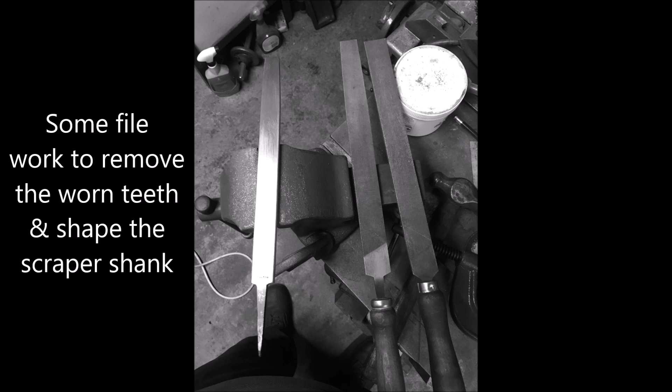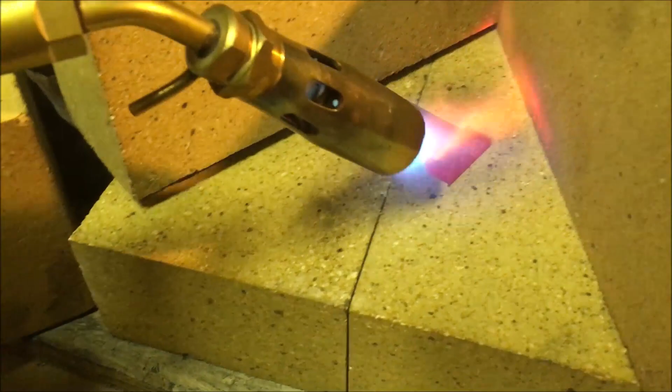Got Junior on the silver soldering, making another carbide scraper. Done that, plenty of solder in there. Just wetted out the joint, and I can feel the heat from here. Keep it flat.

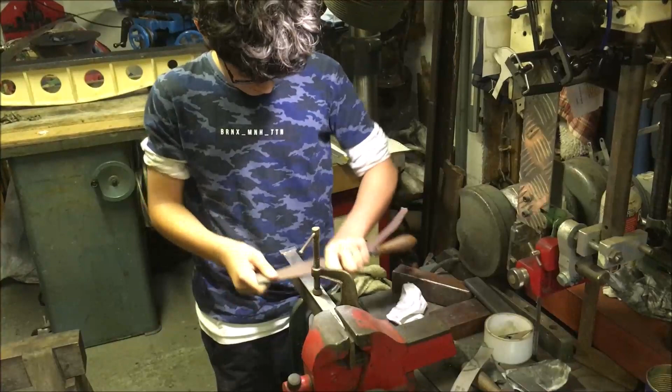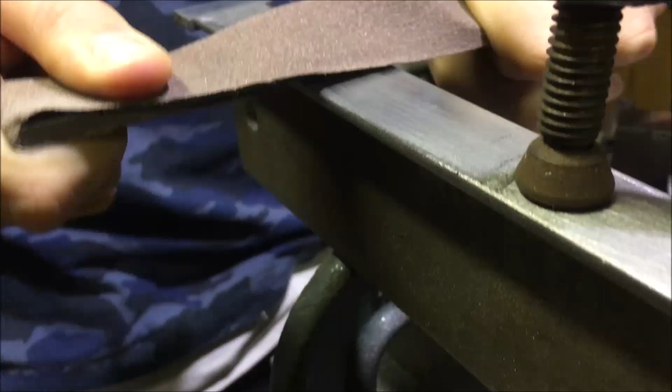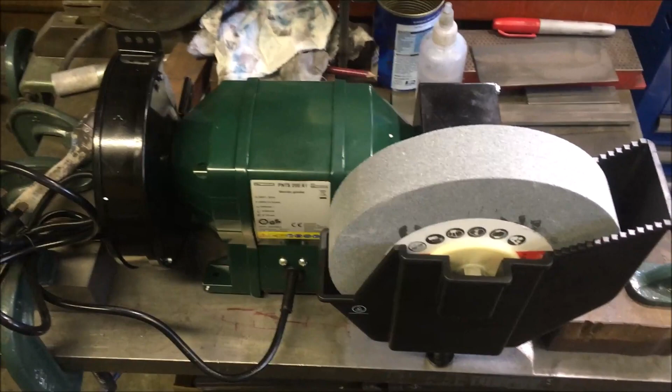So this is what we're going to make our carbide grinding jig out of, and this is a direct crib from Robin Renzetti, who showed it on his Moore style scraping video. I bought it new. Ironically, I had a slightly, well, a much better version of this when I used to do wood turning, and it was quite a handy piece of kit. I sold that for about 160 quid and bought this one 8 years later for under 40 quid delivered.

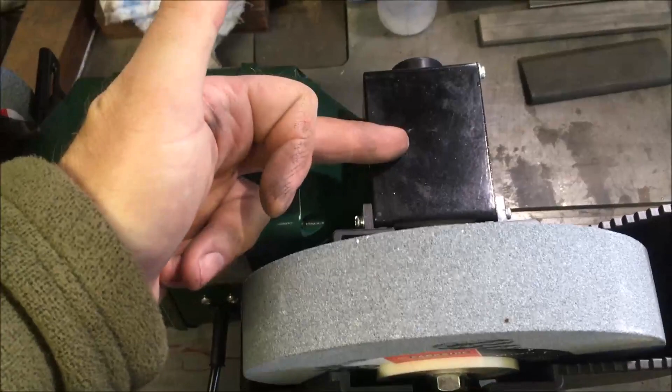So you've got a standard grey wheel there whizzing round, output shaft on this end of the grinder, then it goes through a worm gear on here, and it gives you something in the region of about 85 RPM this end.

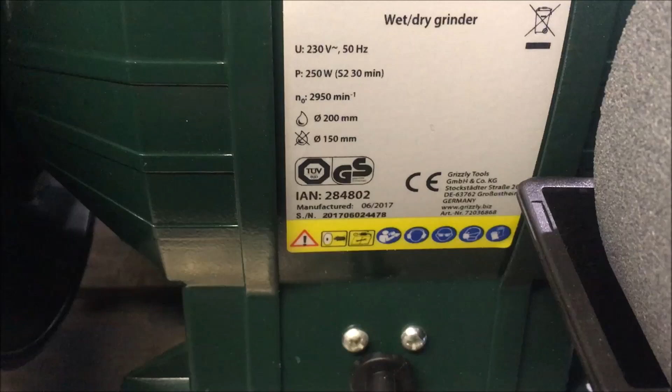So I'm going to take off this paraphernalia, take the large stone off which I'm not using, probably take the small stone off, have a look in the gearbox and see what's there, and then I need to come up with some kind of mandrel setup that enables me to put one of these 6-inch discs on. That's the plan for the day.

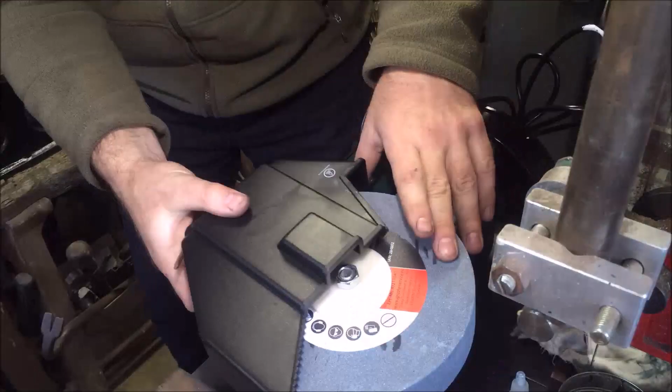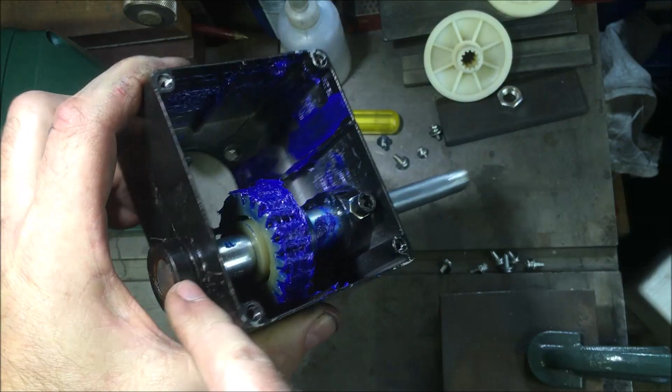Right, so that's the worm wheel. It's sat in two very thin bearings, if they're in there. I'm not bothered taking the shaft out. Basically, it's a 12mm diameter shaft, which is handy because that's the diameter of the discs. Then it steps up, then the worm wheel, and then it's through to there. What I can't see is where the end play is taken.

I assume it's got a groove in that larger diameter, and then that's in there, and then everything's held in place with roll pins. That's like a phenolic or resin, and the worm looks like steel, and it does actually look machined, it's not cast. So I'm not going to do anything with it at the moment.

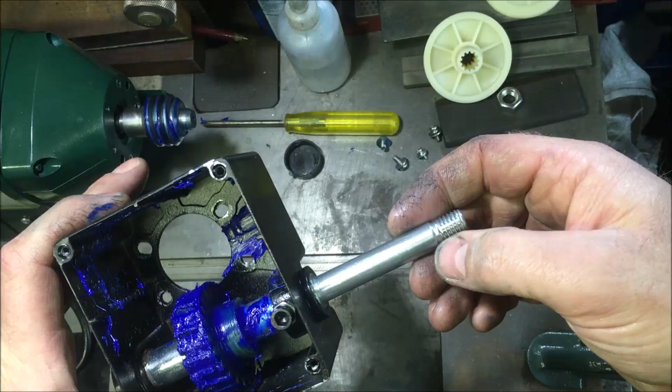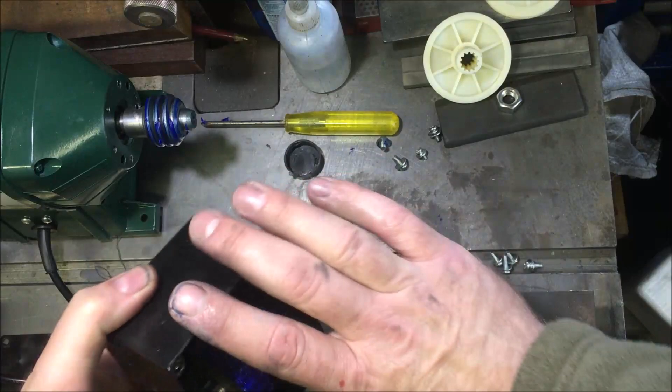I'm going to put it back together and basically cobble up the drive. I'm wondering whether to mount it that way round, which will put the wheel underneath the worm rather than over the head. But I just need to check my heights. It just means the thing's not sitting up here kind of thing. So I'll bring you back when I've done that.

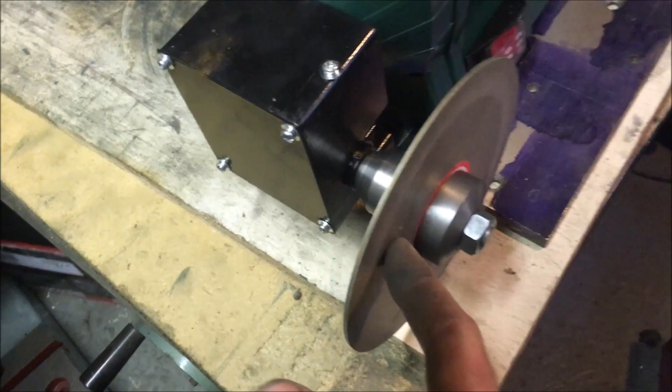Alright, so a bit of an update. I've got the discs mounted now. I've made up a locking washer spacer and a spacer at the back there. It took quite a bit of pissing about trying to get that as a nice tight fit on the shaft, because the shaft was varying in dimension - there was 5 thou variation in it. So I've ended up making the holes undersized, and then I've hand finished the shaft with some abrasive paper.

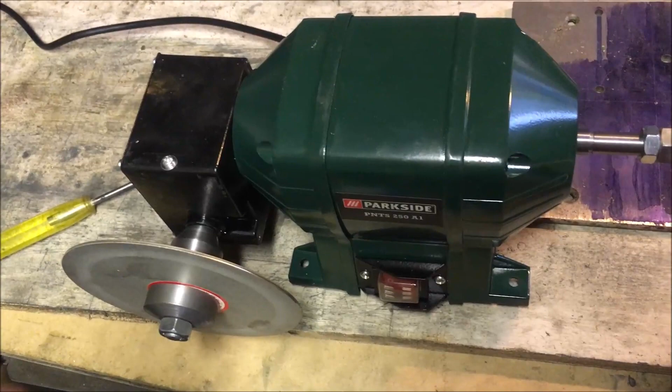So that's on now. I've also swapped the gearbox around. I've decided that I wanted a more compact setup, so I've switched it over. Not least because what I found was I just fired it up and ran it, and there's a tight spot on the worm. So it's free now.

It's not on the worm, it's on the worm wheel. There, it's just coming in now. There. And then it's free again. I'm figuring it's something to do with it being a plastic gear - it's perhaps got a bit of swelling on it, something. Anyway, it'll bed in, no doubt.

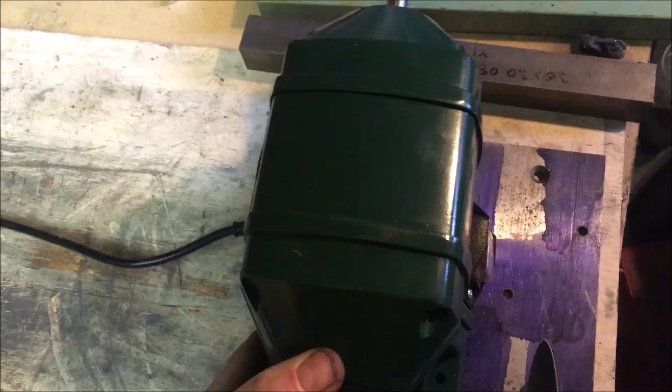So the next problem is to suss out some kind of mounting mechanism without the wheel on the end of it. This thing's a little bit heavy at this end, so I'm going to mount it on a steel plate, and then I want some means of setting up a guide jig here to give me my inclined angle. So as the disc's running around this way, it grinds inwards.

Stefan had used these discs on the high speed end of the grinder and done a sort of temporary setup - I think he's got a piece of wood mounted at the angle. So it's not got to really be anything fancy. What I do want is to be able to set it and not piss about. I want the angle to stay the same once it's set, through whatever it is I'm scraping.

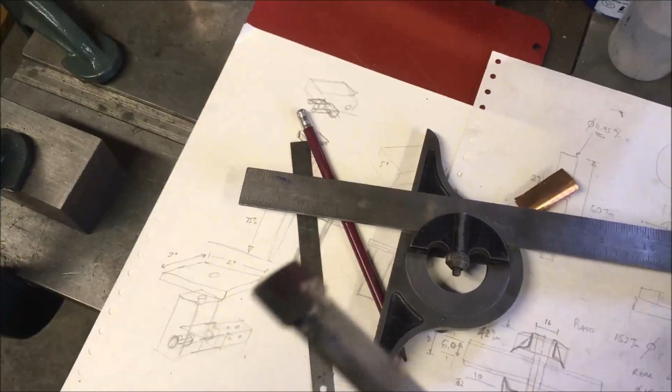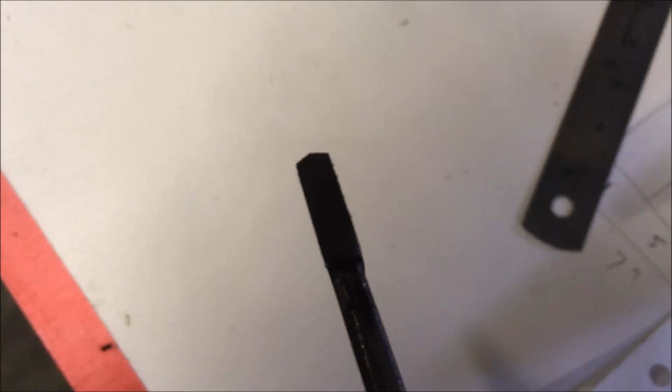So I started to take a look at the end of my scraper that I've just been using, which is this one. Now bearing in mind this has been cutting very nicely for me. Take the copper shim off the end, and what I've been doing is basically measuring the angle on those faces.

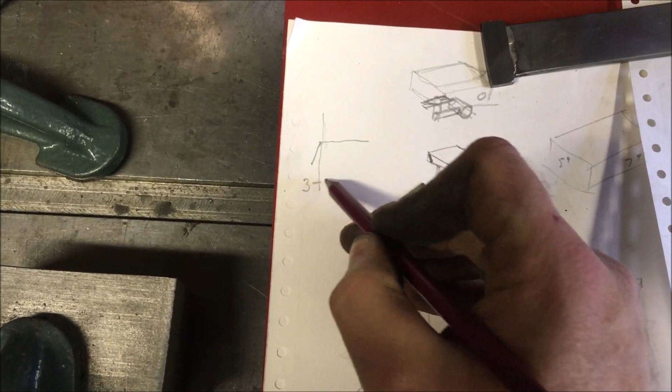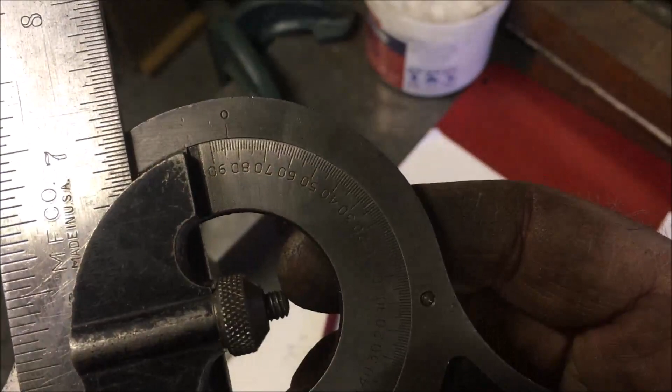Now everything I've read and watched and been shouted about says that from the flat of the tool, that angle is somewhere between 3 and 8 degrees, this included angle here. So best I can measure mine, it ain't anywhere near that. Let's have a look, see. That's what it's supposed to be. So I've just got some 6 degrees, and that's a long way out from mine.

I'm getting something between 12 and 18.

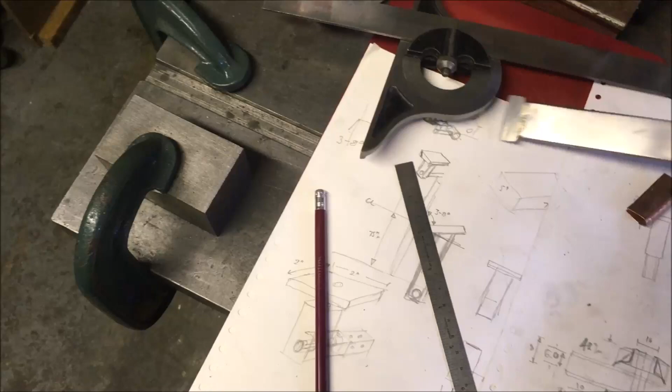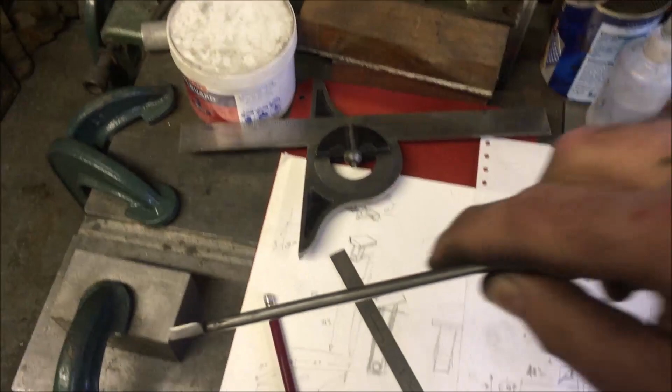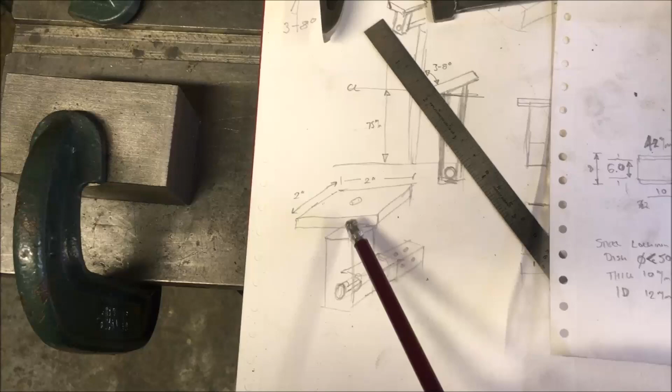What I'm thinking is, no matter what I do, I want this jig to be adjustable. Because the way I've been grinding is putting it up to the wheel on a very small tool plate, then lifting the arse end of the handle to a point, so it could be 2 or 3 degrees out, varying between grinds. What I want to do with this thing is avoid all of that. So I'm going to make a 2x2 inch plate that's what the tool sits on, supported on something fairly substantial, say around 1 inch square coming off the base plate.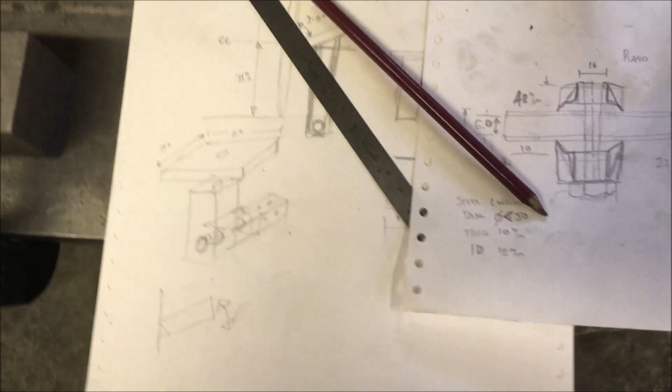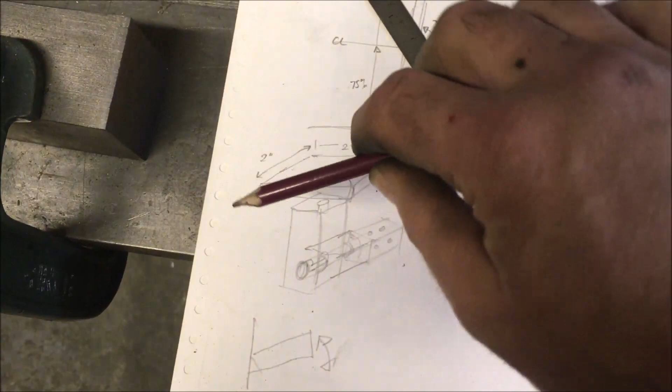I then want to be able to make that angle to the disc. So if that's the disc face, I want to make that angle adjustable by plus or minus 2 degrees. So I either make up multiple plates and make them a wedge shape, thicker at this end or thinner, or I make it so I can actually pivot this somehow. The problem with pivoting it is, as it goes in to increase the angle, that front edge gets nearer to my grinding wheels, which means I've got to adjust in and out as well. That isn't massively complicated, but the more adjustment there is, the more chance of stuff moving when you're working along. So that's where I'm at, giving it some thought, and I'll bring you back when I've got a plan.

I'm just getting set up to dress the end of the piece of carbide, to then silver solder it onto the end of my scraper.

The grinder's worked out alright. The last bit I was going to do was fit this diamond cut wheel on. The problem I've always had with these things is I very rarely find that they fit and run true on that face and on that face.

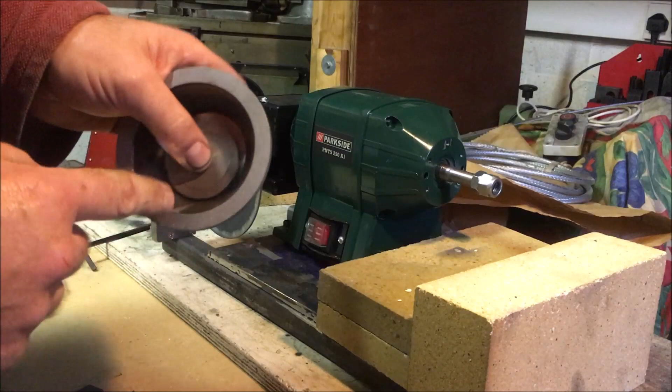The bore's too big for this. That was actually an arbor made for the Clarkson tool and cutter grinder, which, as you've noticed, isn't here at the moment. That might be that my arbors are just not accurate enough, I don't know. But it's bloody annoying when that thing's whizzing round going ding ding ding ding. Might only be a thou out, but it's annoying.

So yeah, it's not the quietest running of motors.

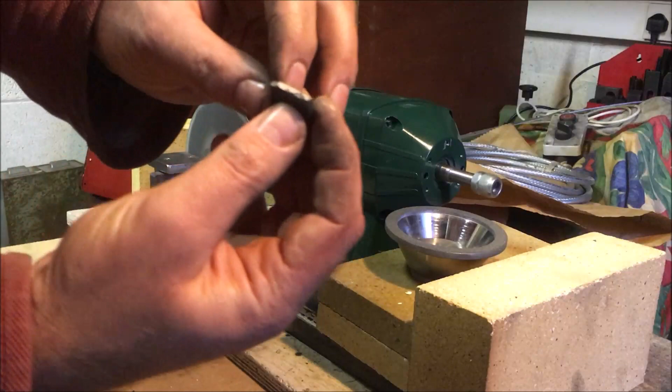So I'm flattening the back of this piece off. Yeah, over there, you can see the break line where it sheared it off. So, flattening it off.

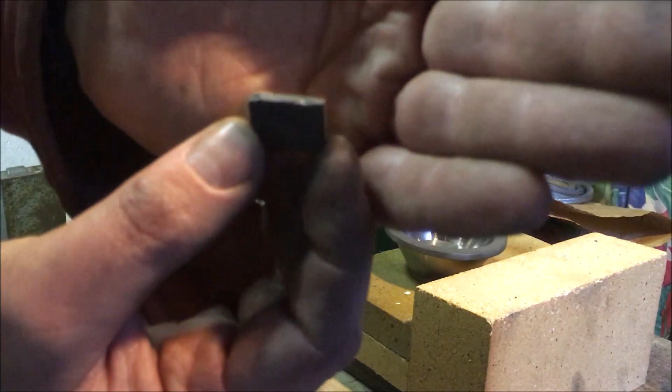It's a hell of a lot quicker, it's not there yet, but it's a lot quicker than doing it on the green stone. I'll change to the coarser grit, so that comes off. So that's a 600 grit, that's a 120 grit.

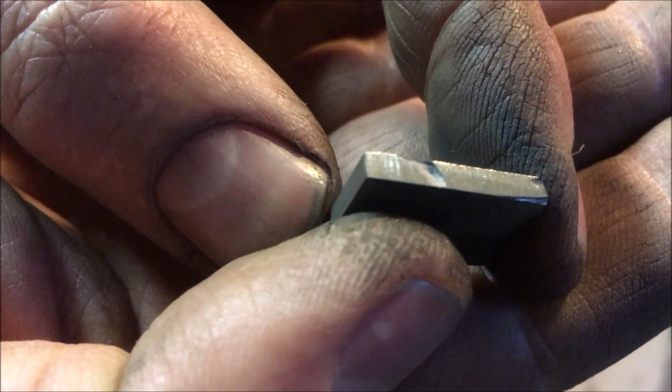Because it's going to be bright silver soldered, but come on, focus, come on. And it's pretty bloody aggressive, that, so it'd be handy for profiling.

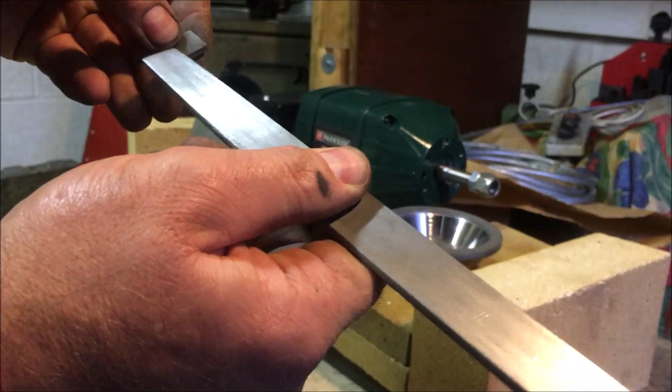Anyway, so now you know. So our next job's to solder that onto the end, and then shape that side and that side, and then shape the end of it.

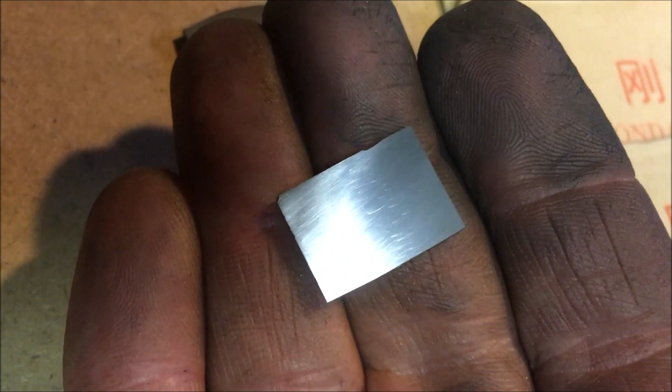Right, so I've spent a bit of time just polishing up the back face, the front and back. So that's a big pudge out of the way. That's how the carbide arrives, and I don't know whether you can see that very well. It still needs a bit of work, as you can see some deeper scratches. But I'm going to clean it up, finish cleaning it once I've got it brazed on.

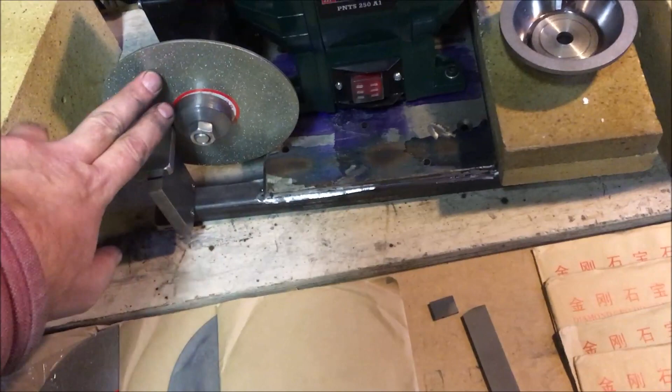Regarding the discs on this, that's a 120 grit, and I bought a 120, a 240, 400, 600 and 1200, and then a 3000 grit, which is on the back face. I think that worked out at about £18 delivered, so let's say $22.

I then bought some of these little flat hones, and I got basically these for polishing up the back. So a 12, 15, 2000, 2500 and a 3000 grit, and that lot was a tenner. So not expensive, the whole lot 30 quid. I think I paid more for that wheel, which I've still yet to manage to get to run true.

The 120 grit shifts quite a lot of material, but it's not actually that much faster than doing it with something like a 15. I've still got to do some trials on that. What I found is lapping on the plates, a bit of Windolene seems to do the trick for a lubricant. You can do them dry, but it seems to just shift the slurry of carbide powder away.

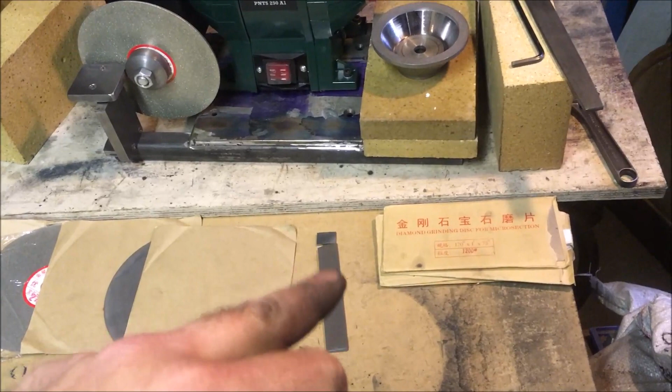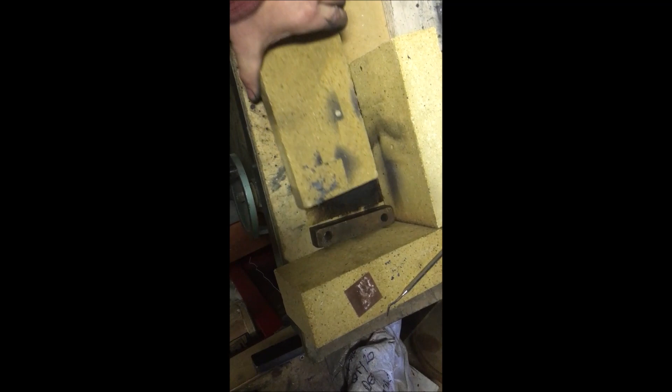Right, so I'm going to clear this lot away, silver solder the tip onto the shaft, and then polish it up, and then the last thing will be make up the handle. Don't forget to leave an air gap underneath your hot brick, or it scorches.